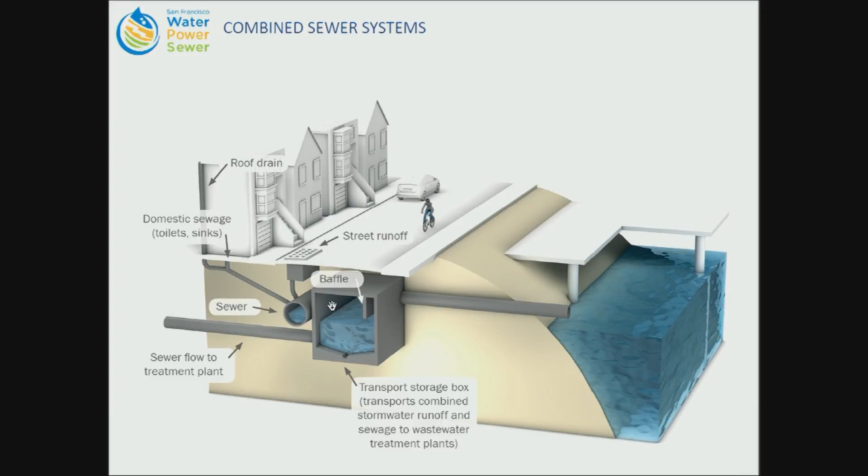And we have what are called large transport storage boxes. Does that work so I can show you? So these are large box structures located at the low end of our city. They're sort of like moats that collect both stormwater and sewage into the same set of pipes, where it can be held and then pumped back to our treatment plant.

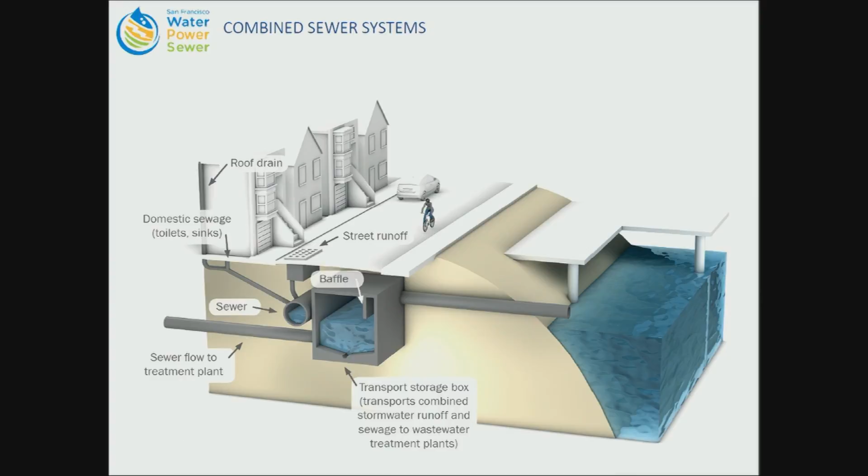Under intense storms of long duration, we can discharge that stormwater and sewage into the bay or the ocean. Approximately 90% of our flows are treated at our wastewater treatment plant, which is different from most cities throughout the Bay Area where the sewers are separated, and you see those 'drains to the bay' stencils on catch basins. We're in really great shape in San Francisco because we can hold and treat that stormwater, and we remain in regulatory compliance. But when we do flood or discharge, we are discharging combined sewage, so it is a concern that we would like to improve upon.

Like many cities in the country, we're facing a lot of challenges. Drought, we live in drought country and it's getting worse with climate change. We need to diversify our water supply. The majority of our pipes are more than 70 years old.

We live in earthquake country. While we're in compliance with those combined sewer discharges I mentioned earlier, we have a very active community who care about these, and we want to do better. Climate change, we're already seeing impacts with flooding and sea level rise. And under very high tide events, flows are coming back into our system.

Environmental justice, we have an environmental justice policy, which requires that we ensure we're not disproportionately impacting those people that live in the proximity of our infrastructure. So we're trying to integrate that and community participation better into our decision-making processes. And future regulatory compliance - we don't anticipate that the regulations in place when we built our system will be those in the future.

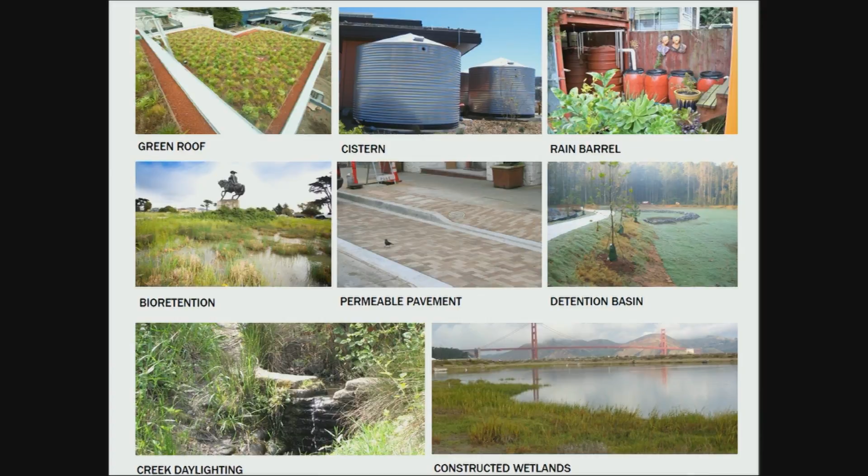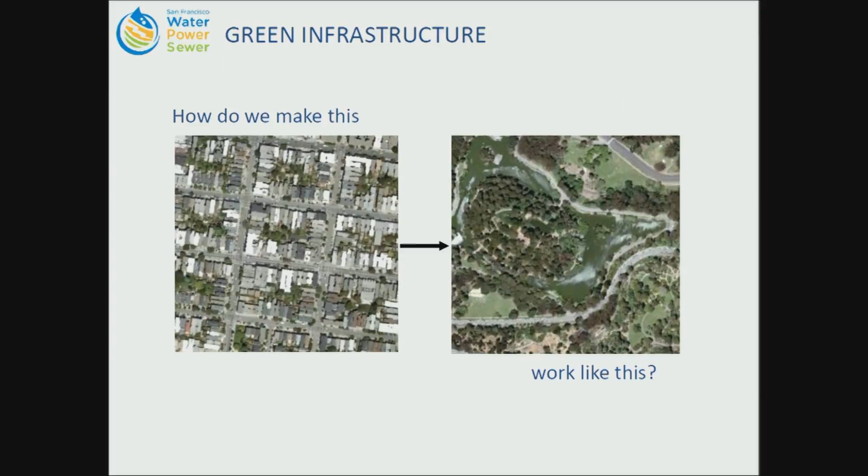Okay, so some of the technologies we're talking about that may not be familiar to everyone are green roofs, cisterns, pervious paving, rain barrels, creek daylighting, and constructed wetlands. So really with the vision of green infrastructure is how do you take a built-out gray city and make it perform like a green space from the way water runs on it.

The program that I work for and manage is called the Urban Watershed Management Program. And so our goal is to really use green infrastructure to protect water quality and use it to slow and reduce stormwater from entering the sewers in the receiving water body, promoting infiltration wherever possible, reducing the use of chemicals that we use to treat and convey stormwater, and wherever possible to revitalize natural watershed functions, so taking advantage of the natural soils and topography that we have in the city, and provide community benefits.

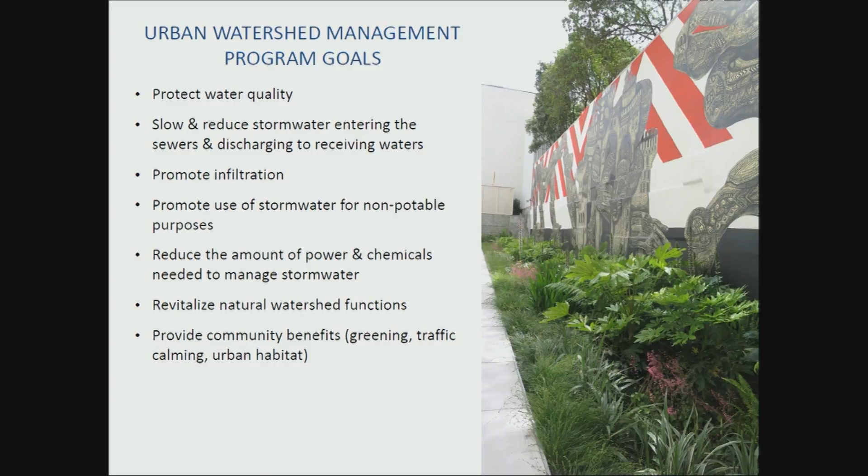And that's that sort of multi-benefit outcome that our definition went over before. So we have been managing stormwater in a bunch of different ways, and our program has been interacting with stormwater. So today's workshop is really building on these other efforts, but in 2010, we passed something called the Stormwater Management Ordinance, which I'll talk a little bit more in detail.

We've been building early implementation projects, which are demonstration projects associated with our sewer system improvement program. And we've been implementing watershed stewardship grants, which I'll talk about, and then we oversee the redevelopment areas and make sure that green infrastructure is implemented on them. So as you can see, San Francisco is beginning to have a fairly diverse portfolio of green infrastructure out there.

So really today, we're going to be implementing, or talking about implementing, on schools. So why do we care about schools? We have these new regulations. We've been working with a bunch of designers and people in the community complying with our regulations, and we're really wanting to step it up and bring the best practices and technical assistance to make these projects really amplify many benefits. They're large impervious surfaces.

Schools, as you can see, are some of the largest landowners in San Francisco. And when we did our public engagement work associated with watershed planning, the top place that our public wanted us to invest green infrastructure dollars was at schools and parks. And clearly, anytime we engage with the schools, there's great opportunities to educate future ratepayers.

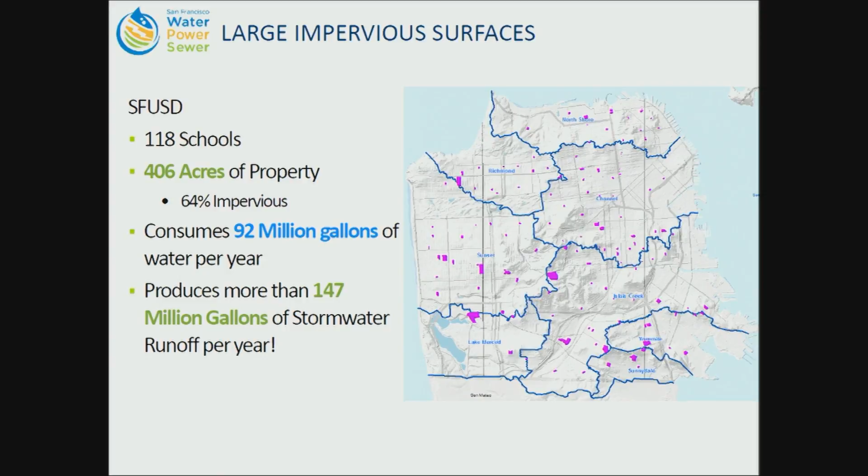This is a little bit of data about the watershed, the school's role in the watershed. There's 118 schools, making up 406 acres of property. They're about 64% impervious on average. They consume 92 million gallons of water per year and produce more than 147 million gallons per year of stormwater runoff.

So we've been doing watershed planning, as I mentioned earlier, where we are doing a sewer system improvement program, which is a 30-year look ahead at how we will build out our sewers in San Francisco. One of the key elements is looking at collection system planning, that is the drains all the way from streets down, taking runoff from every neighborhood and street and building and bringing it down to our sewer systems, our wastewater treatment plants. The collection system is the gutters, the pipes, and the pumps.

So this watershed assessment is a planning look, a watershed approach for looking at how to plan at each of our individual watersheds in San Francisco. It's a planning unit where we've looked at all the opportunities for green and gray solutions for managing our collection system, schools being a key opportunity, and looking for project synergies with other agencies.

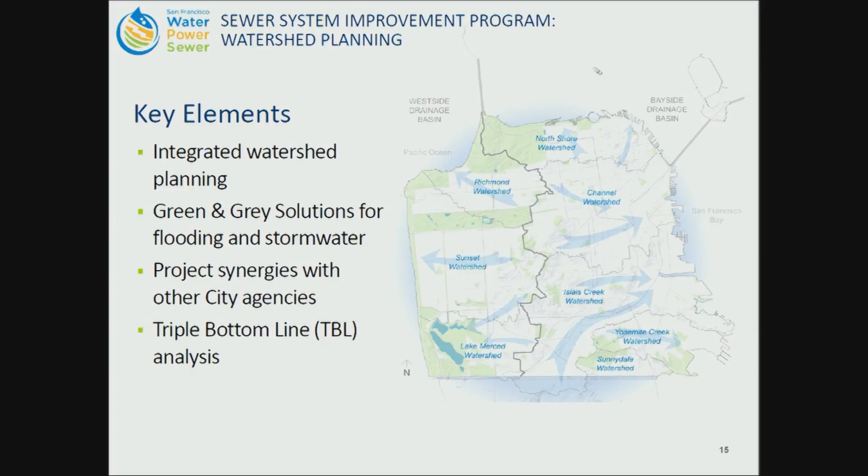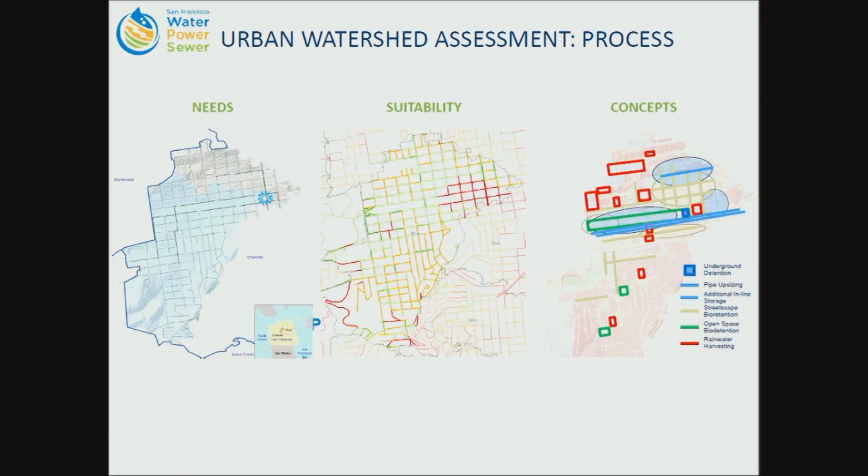Here's an example where we're looking at an individual watershed and noticing all the places that it's not meeting our levels of service, then looking at all the places where there is an opportunity for either a gray or green infrastructure solution. Where problems overlap with opportunities, we're coming up with project concepts. These are being folded into a suite of projects, programs, and policies that we will be recommending for going forward for investment in the future with our commission.

We've looked at a lot of the schools and can tell you how suitable they are for green infrastructure. A lot of the proposals coming out in the spring will identify which schools we think will be the best opportunities for investment for green infrastructure.

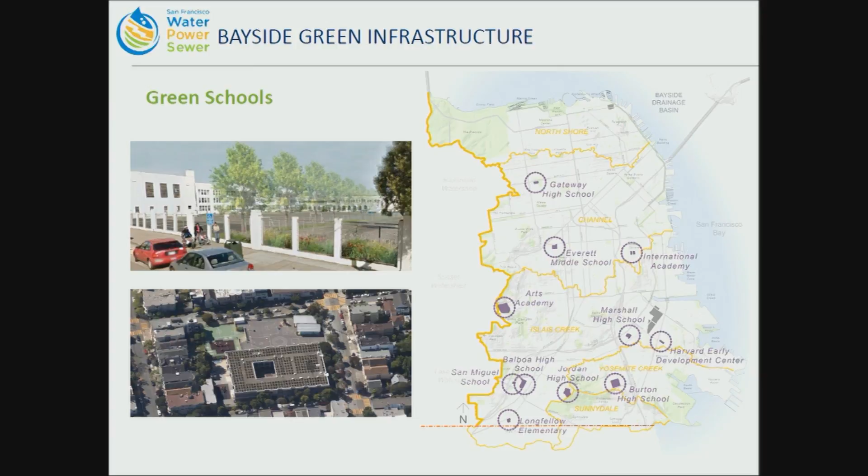Another major part of our program has been education and outreach, and that is the watershed steward. One element of that is the watershed stewardship program. A lot of you may have already taken advantage - can we get a raised hand if you've applied for a watershed stewardship grant? Yes, Kat, yeah, and Carla, yeah. These have been small grants that we've been implementing.

We're trying to inspire the community to take out impervious cover and install rainwater harvesting systems and drought-tolerant plantings. To date, we've granted over 650,000 dollars in grants to schools, but you can see they're small grants.

We also are doing a lot of education outreach in terms of technical materials, and this workshop is the beginning of a new training series we hope to keep implementing to help raise the bar in terms of green infrastructure planning in San Francisco. You can go on our website and download all of these free training materials - technical guidance documents that we put a lot of work into and I think are fairly helpful.

As I mentioned, this workshop is going to be part of a series of other training workshops. We've partnered with the Department of Public Works doing lessons learned and reflecting on how the city's doing and trying to improve things, then bringing in training materials, speakers, and trainings for people throughout the city to improve green infrastructure, because it's a new area for many of us, and we're trying to make sure we're getting the best industry practices available to everyone here. So we're working on a design training, construction inspection, and a maintenance and monitoring training currently.

This kind of idea of zero stormwater discharge is something I'm really excited about, because last year at the district we committed to zero energy schools going forward. Maybe the next project could be for us to get a working group together to figure out how to have zero stormwater discharge schools as our next big challenge.

As a result of these efforts and the inspiration in Berlin, we put together a master plan with Sharon Danks, or with her firm, for Starr King Elementary School. It ended up being a very challenging project because of the site. But the goal was not just to do an outdoor classroom in the corner of the yard somewhere, but to really try to transform the whole site.

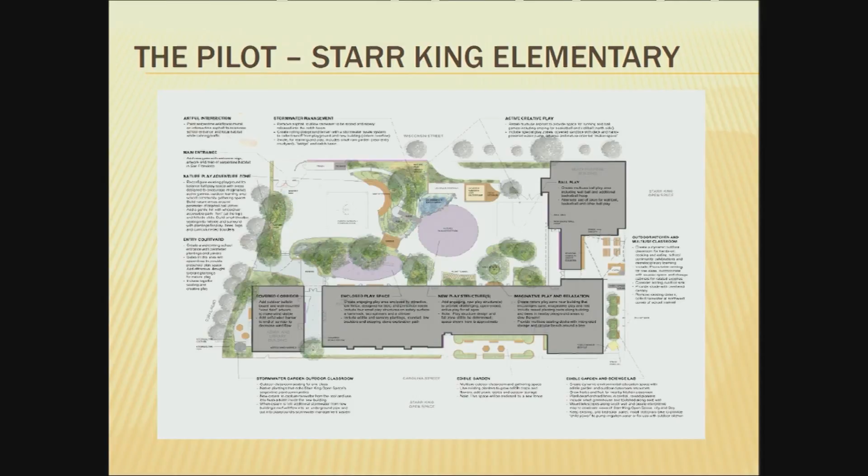Now this is the master plan. We were able to do most, but not all, of this. And now we're waiting for those plants to come in and for that lush feeling to really take over at Starr King. Here you can see some of the early photos right after planting.

So our goal with this week and with our work back at the school district is to try to figure out how we can layer those multiple uses into our yards, so that they function not just as ball play space, but also have some stormwater functionality, and so that kids who play in different ways can all find a place on the schoolyard that works for them.

One of the people who helped us get to this point is Sharon Danks, now the CEO of Green Schoolyards America. So let me introduce Sharon and let her tell us a little bit about how this fits into the national context.

Thanks, Nick. Very happy to be here today with all of you. I'm Sharon Danks. I run a nonprofit called Green Schoolyards America. My background is environmental city planning, and the work I do now is to try to improve the environment in cities by changing the landscapes where children learn and play every day, with the goal of improving the city's well-being and children's well-being at the same time.

Green Schoolyards America's work includes research into best practices, outreach with school districts, partnerships with public agencies, and also policy change work to try to make this an easier field to work in the future. So what is the need? My goal in this short presentation is to show you what the international context looks like in this field, and also what our local and state efforts have been so far.

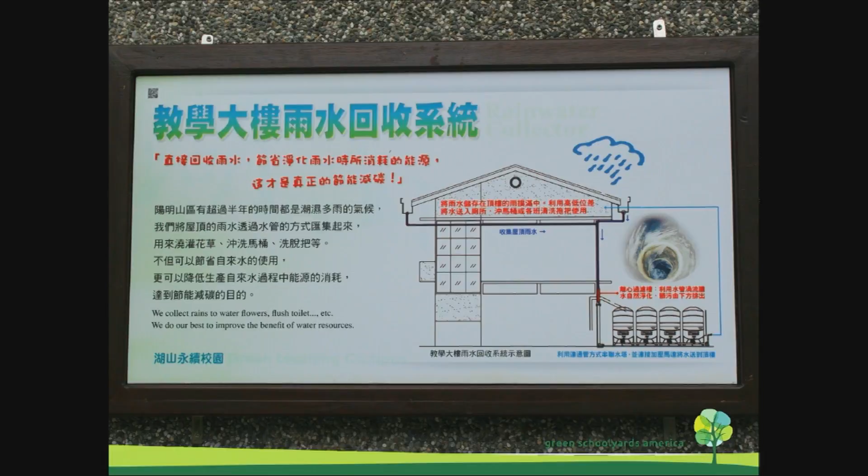So these ideas are really becoming pervasive around the world, and it's great to see San Francisco moving in this direction, and others too. We have a wide variety of things happening here. Not too many large examples, a lot more smaller garden examples, which are great. But we're looking to scale up the infrastructure scale examples. I like to say moving from a bake sale funded model of greening our schoolyard to an infrastructure scale model. That's what we're trying to do.

The government of California voted to pass the Living Schoolyard Month resolution in 2014, which declares the month of May to be Living Schoolyard Month and asks all schools to design and construct student-accessible green space on their grounds. That resolution passed unanimously. It doesn't have any money, but they say they agree with us, which is good. Not yet. That's round 2.

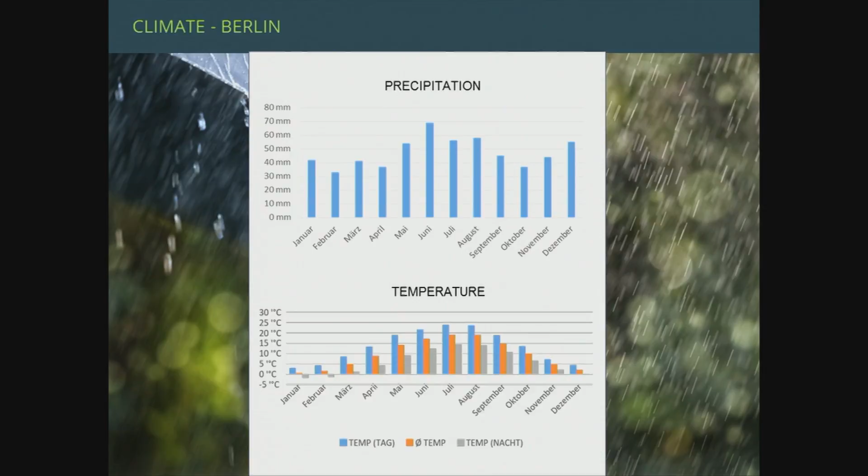The climate context in Berlin is our temperature goes from high peaks in the summer, more than 100 Fahrenheit for short periods, down in the winter to temperatures below 0. So we also have snow in the winter, and rain, which altogether is precipitation from 1.5 inch up to 3 inches per month. And as I realized this week, San Francisco has a lot of rain too.

Our groundwater and drinking water system is in a pretty good situation because Berlin gets all its drinking water from the groundwater within its city limits. And this also works so well because we have 13 lakes and 5 rivers and 224 miles of shoreline, including those rivers and lakes.

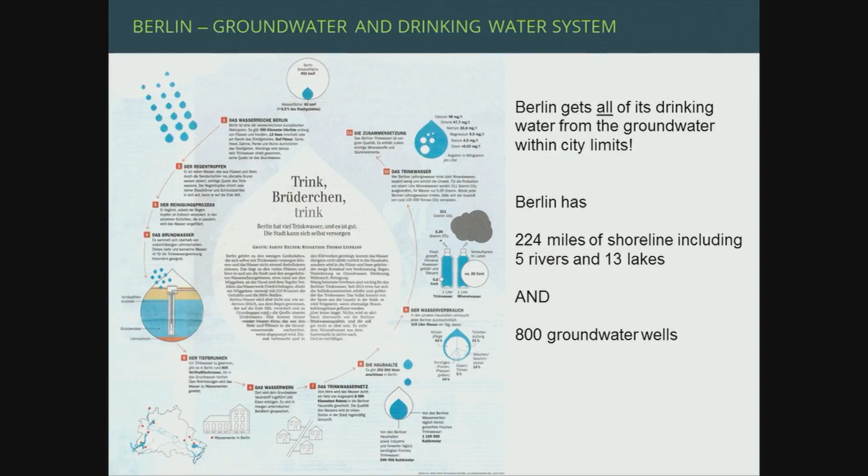So the water from those water bodies goes into the system and into the groundwater, and we also try to infiltrate as much as possible. The Public Utility Commission has 800 groundwater wells where they get the water up and then into the plants, drinking water plants, and then send it to the household.

So municipal water supply companies provide 38.8 million cubic feet of drinking water daily. And the drinking water was just recently in the newspaper and in the news in Berlin is better than bottled water, which is special because we have a lot of restrictions for bottled water. So in the drinking water there's a lot of minerals, and it's healthy to drink it.

To improve and get more infiltration on the sites, Berlin has a stormwater fee, and every landowner has to pay an annual stormwater fee. It's measured by the amount of paved or sealed space on your ground. So you pay $1.9 per square meter, which is 11 square feet of paved surface.

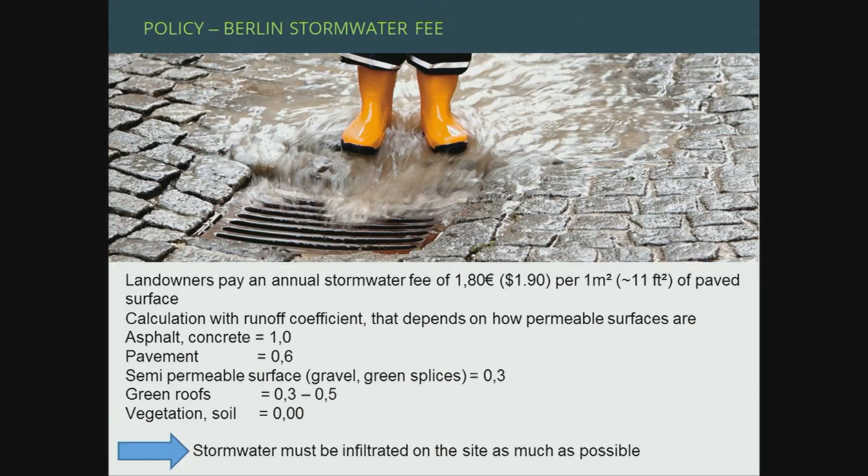And if there's vegetation or soil, you don't have to pay your rainwater fee. So in the ideal situation, you would just pay for your roof, and if it's greened, only half of the square meters of the roof. So every landowner tries to infiltrate as much water as possible on the site, and this also applies to public buildings, so the municipal agencies are also interested in infiltrating as much water as possible on the sites from the schoolyards.

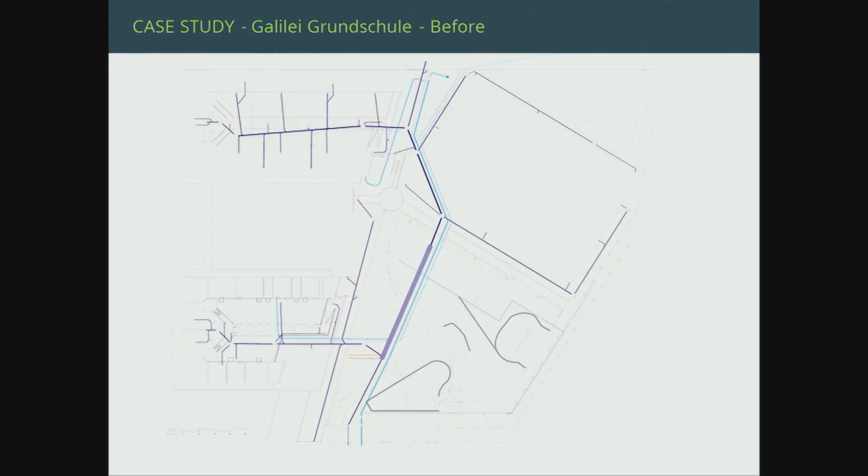When we went there, we got money from the environmental program to reduce impact on the environment. So we decided to change the school ground to infiltrate all the water on the site and to also get all the water from the roofs, which before we came just went through pipes into the public sewer system, and to change it to have the water from the roofs stay on the site and infiltrate there.

So this is the plan for the schoolyard. You can see the roofs from those buildings, and all the green stuff is what we planned and built on the site. It's all open surface so that the rainwater just drains on the site.

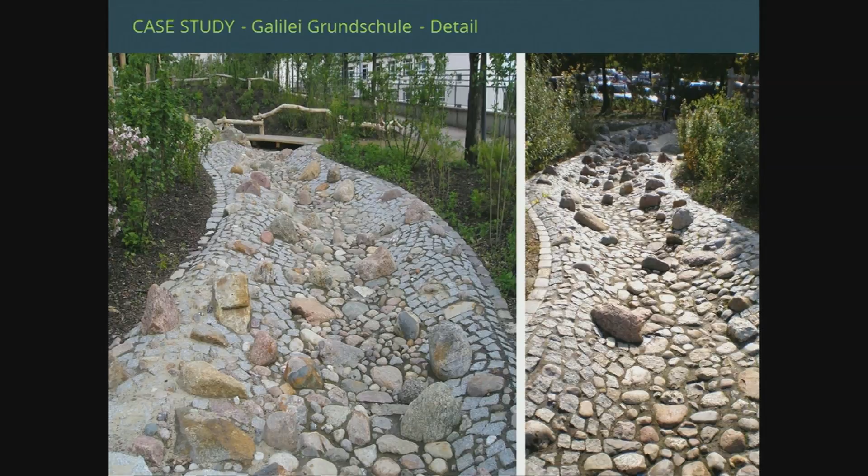It's the technical part. So when it rains, the water goes down this little creek, and down there - I showed the arrow where the water comes down - it goes into a retention area, which also becomes green after a certain time. This is where all the roof water infiltrates.

So the whole thing has zero stormwater fee, which is great for the city because they don't have to pay this. And by the way, it's a playground for the kids.

We also built topography for the planting, and small walls to make it more robust for the kids' use. So this is an area where the kids can really play without destroying all the nature.

When we look down the schoolyard, it's basically like a green landscape. On the bottom of the schoolyard, we have play structures, and we have open soil everywhere. This is like a slide in the landscape.

There's a natural stone wall, which is supposed to be a climbing wall. In this picture, it's not carved, but later the kids carved this into a sculpture so they could climb on it.

We put in a swing, and I also wanted to show you that the sporting area on the school ground has a plastic surface, which is supposed to be permeable, but usually it doesn't work when it's really heavy rain. So we have this drain here that leads into the tank and into the system.

The total cost of the whole project, Galilei Schule, was about 500,000 euros, which is about $700,000 at this time—not today, unfortunately for me. I just want to tell you this because it's a cost-saving design, since green is always less expensive to install than concrete and asphalt pavement. The more green, the less expensive.

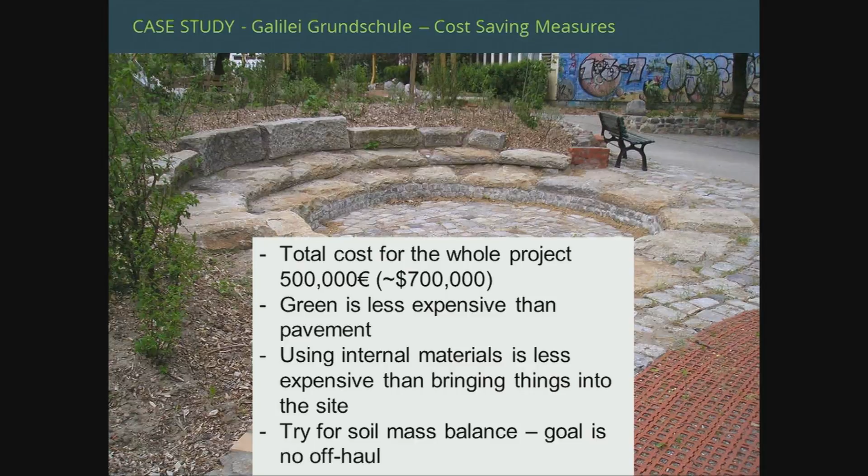We also try to use internal materials and not bring things into the site. So when we unseal concrete, we oftentimes use it to build small walls for the planting beds or to have pavers with green gaps. And also with the soil, we try to have a mass balance, so the goal is always to have no off-haul.

The benefits for the urban environment by these designs are reduced pavement and increased green spaces for the kids, which is so important because the schoolyard is the last green reserve within the city limits, where the kids can play protected and develop—well, can play with nature.

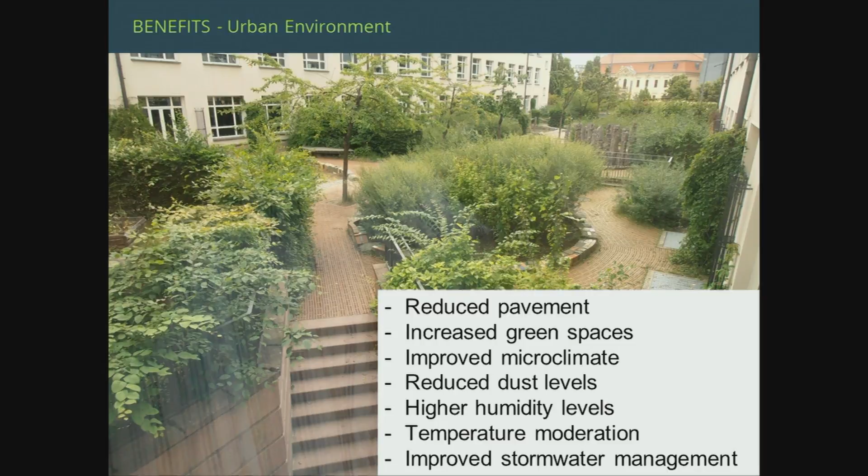It's improved microclimate, which is also very important, not only for the environment but also for the school itself. Within these small yards, like in this picture, it's a lot better to have a good microclimate also for the classrooms—less dust levels, higher humidity levels, temperature moderation, which is also important because we have more high temperature, dry times in Berlin. So we have temperature moderation and improved stormwater management.

The benefits are also for children's well-being. So we can build spaces for outdoor learning, spaces for different interests and needs for the kids outdoors, spaces for a range of climbing and movement possibilities, and spaces for recreation and relaxation within school time but also after school. So we open this schoolyard after school for the public and close it at dusk.

Another benefit is social emotional development and violence prevention, because we always have the school community participating in planning and construction. This builds skills in collaboration and negotiation techniques for the students, so they discuss the plan—what do we want, what we don't want, what is really important for us, what should we get rid of. Because it's always hard to think about what you might want when you have just a plain concrete schoolyard in front of you. It's really hard to imagine, and it's a process to understand that it is possible to change it and do a lot of things.

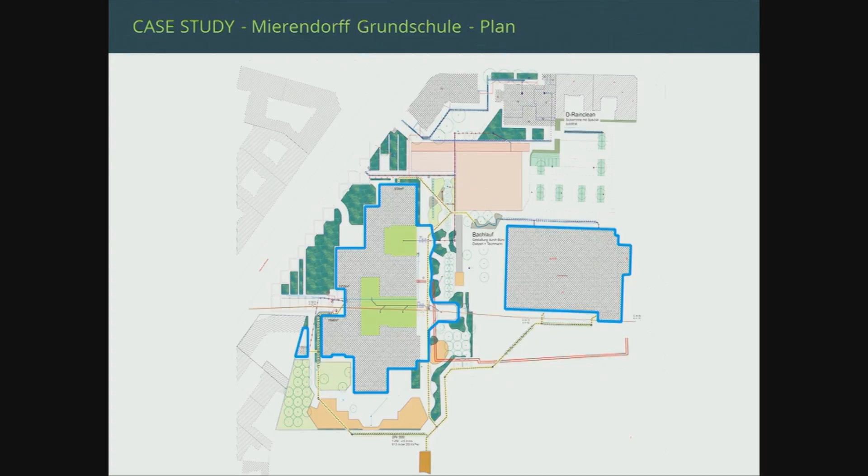For the roofs, we cut off the connection to the urban sewer pipes from the street. For the buildings, we have pipes that go into a retention area under the surface, where the water is infiltrated after a time.

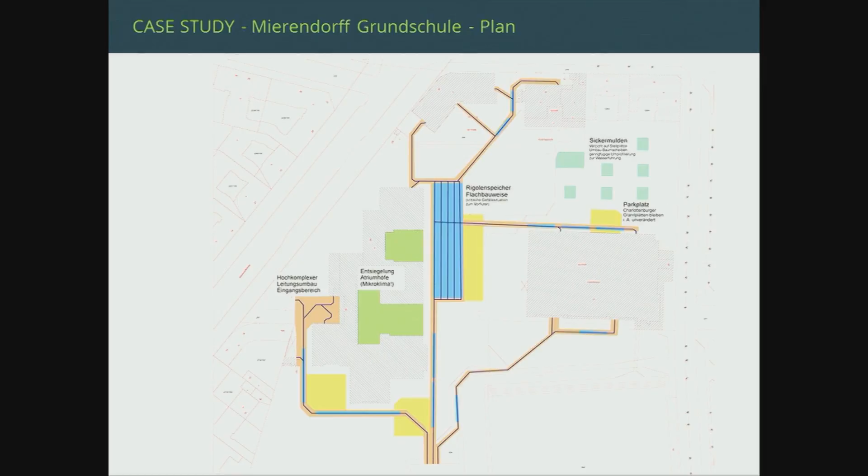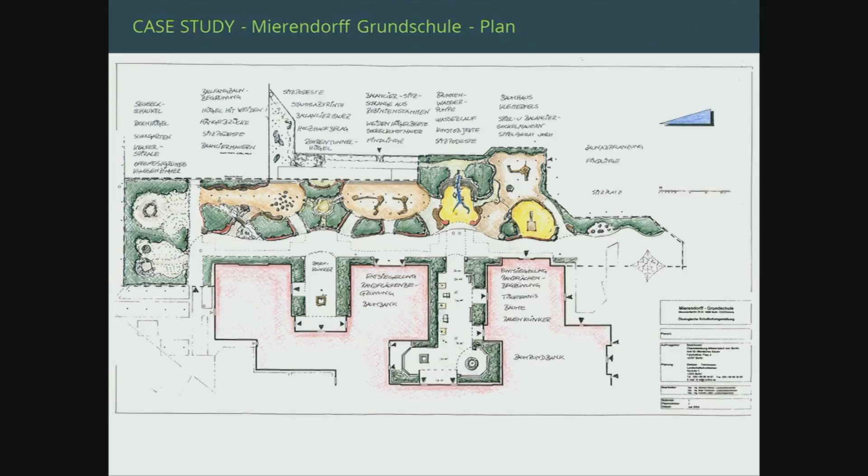There was an overflow to the river Spree, which is on the downside of this picture. The Spree is a river in Berlin, a main river. We got money for this project from the Environmental Impact Reduce program. Because there was a schoolyard, we also unpaved the schoolyard and built a green and living schoolyard.